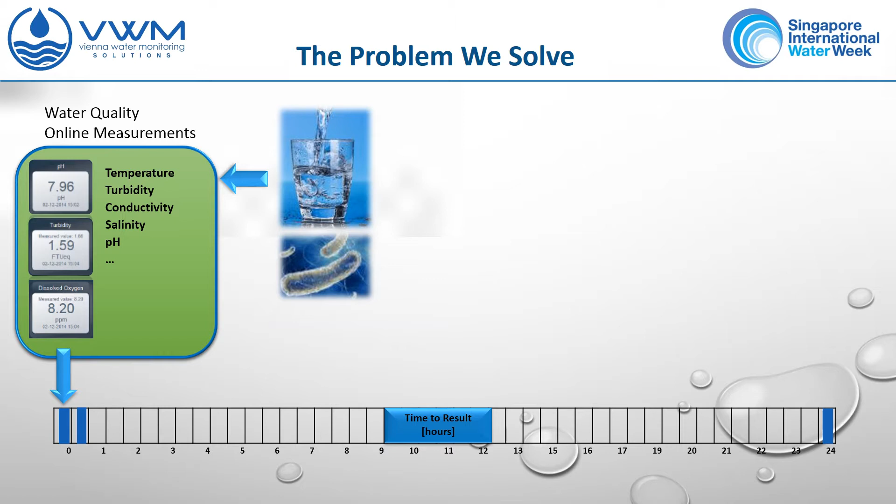If it comes to that water quality parameter, we still have to undergo the process of taking the sample to the lab, process the sample in the lab, and that's the time when already the first health effects occur. But then we have to incubate it, and then we have to count the cell cultures that have been formed, and then we get a result after 18 to 72 hours.

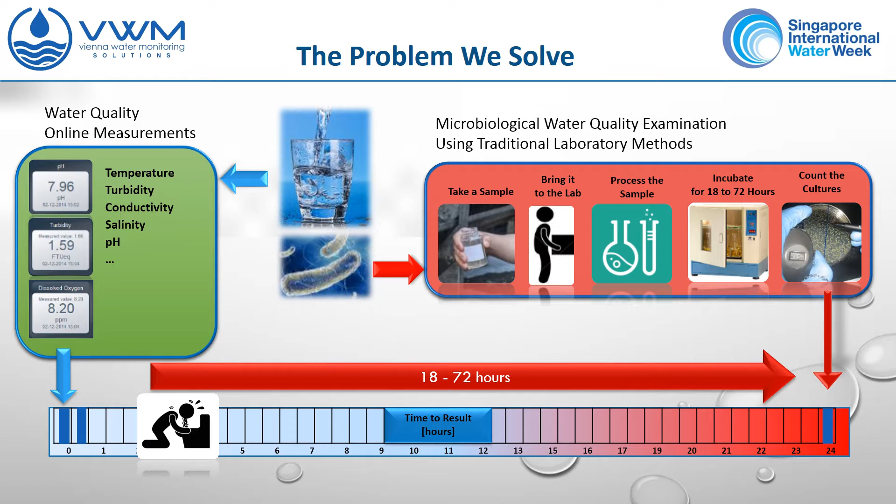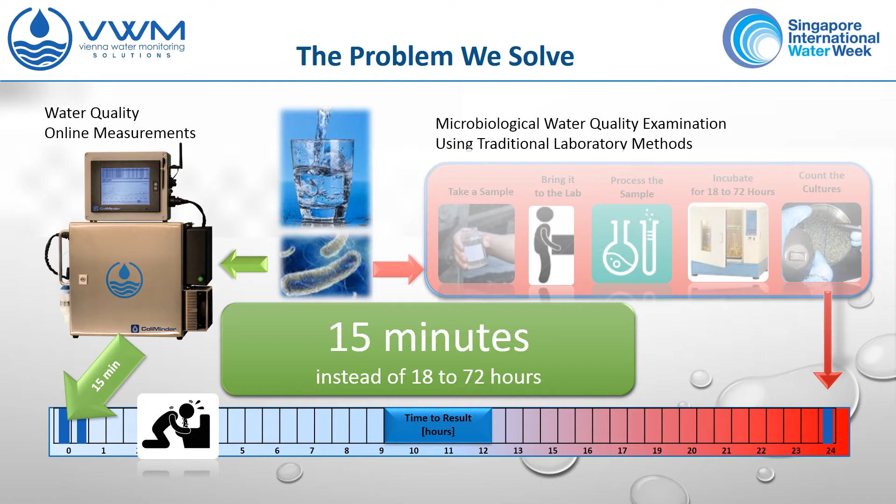And that's exactly what we're addressing with our technology. We offer this important parameter within 15 minutes and fully automated. Is this possible? How does it work? So we have a look at the traditional method to evaluate bacterial contamination. This method is based on

bacteria forming cell cultures. So a water sample is brought on a plate with growth media, and then we wait for 18 to 72 hours. And then we count the colonies that have been formed out of our sample. This takes 18 to 72 hours because of the growth of the bacteria, something we cannot speed up. So we had to find another solution, which is not depending on the growth.

So what we do is we are directly measuring the metabolic activity of bacteria. Bacteria use enzymes for their metabolism, so we measure the enzymatic activity that is specific for our target organisms. Both methods are measuring a direct genuine property of living bacteria. If there's living bacteria, some of them can grow cultures. If there's living bacteria, every living bacterium has to have a metabolism, otherwise it's not a living bacterium.

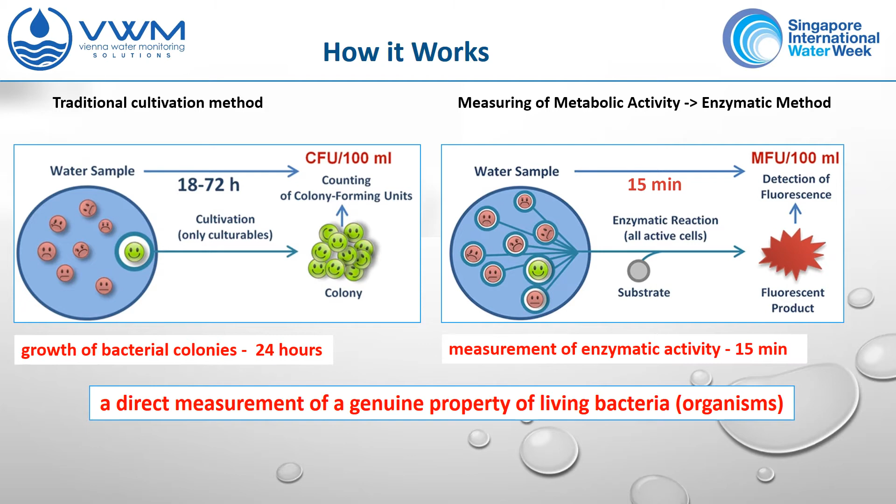And by utilizing the metabolism of the bacteria instead of the growth, we can speed up the time to result from 24 hours to 15 minutes. We are able at the time to offer reagents to detect E. coli contamination, coliform contamination, enterococci, or total bacteria.

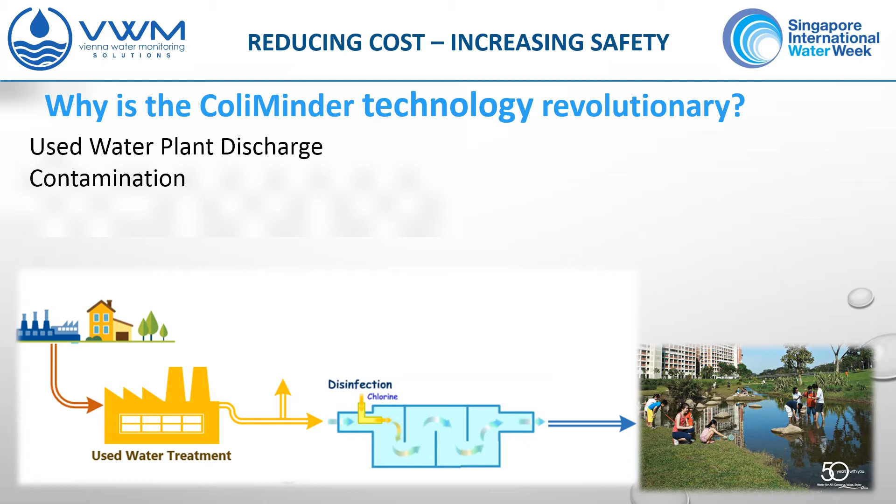I'll give you an example on why this technology is revolutionary. It's just one example, something which is easy to understand. If we think about a wastewater treatment plant or used water treatment plant, and if you want to dispose what's coming out of the plant into the environment without any hazard to the people using that as recreation area, we have to disinfect the outcome of the treatment plant, of course.

So if we would evaluate what's coming out of the treatment plant with one sample a week, it would look like that. Single dots of results, that's the contamination level. Not very much to see. If we would do a daily sampling, we would get these green dots here, and we see there is a contamination peak here. Contamination is about 2.5 times higher than here.

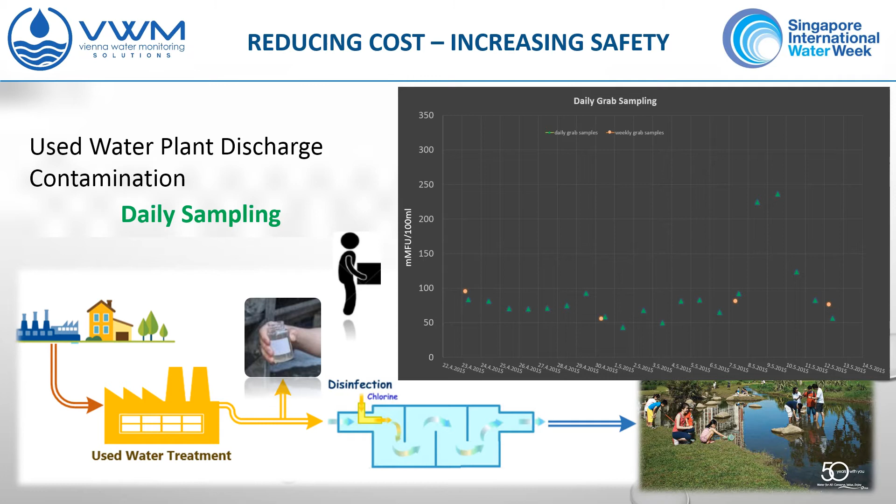But of course we would get these results always one day later, so too late to take any action on it. So if we now introduce our technology, the contamination timeline looks like that. That's an actual timeline of a sewage plant serving 1.5 million people. You see a daily fluctuation, a high towards midnight, a low in the morning. Sometimes things happen in the process, and then you've got a contamination peak just for a few hours. It goes down again. Sometimes contamination is higher, but you still got these daily fluctuations.

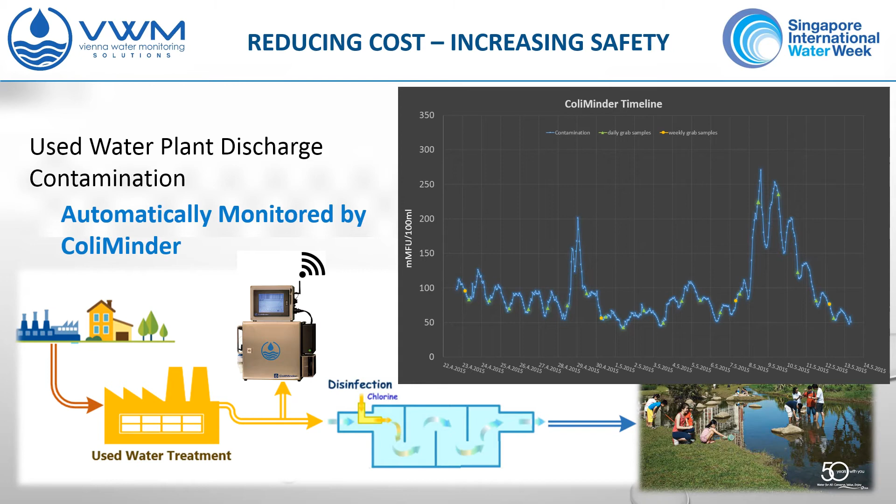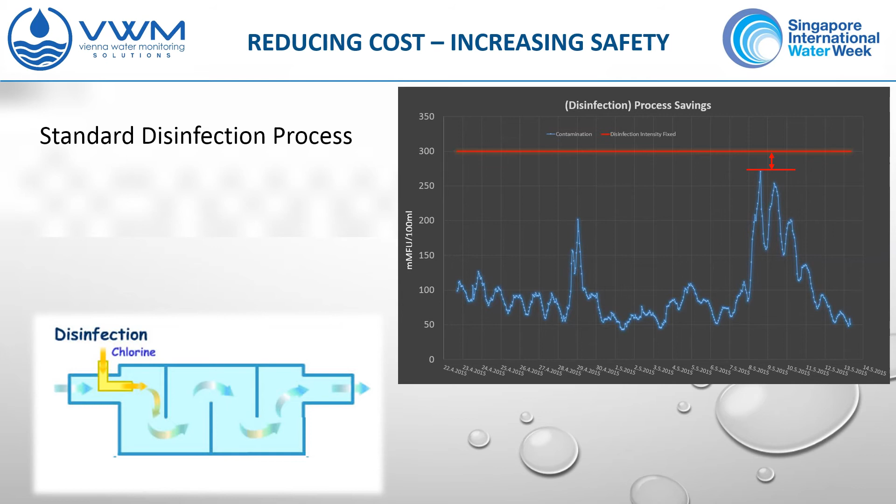So that's the real timeline of a real sewage plant. And as you see here, we get the result immediately, 15 minutes after the sample has been taken. If we now think about our disinfection process, with daily or weekly sampling we have to run a process at this level to be safe, even if a high contamination is present, even if a peak occurs. We have to have a disinfection process at this strength, just because we don't know what actual contamination is present.

If we now introduce our technology, we can exactly measure the actual contamination, and we can control the disinfection process according to what's actually in there, according to that line. So we can run a process like this, controlled by the reading of our ColiMinder. And compared to the standard process, we will first gain some more safety in the peaks, because we run the process at a 30% higher level than will be needed.

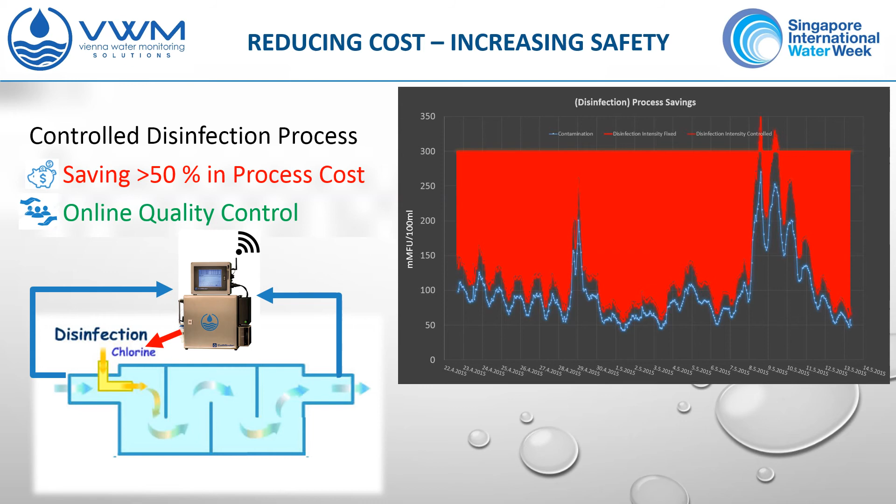But we will also generate about 50% reduction in process cost, because we don't have to use that high disinfection intensity all the time. And at the same time, we would be able to monitor what's coming out of the process, to safeguard the whole process regime and to make sure that nothing's happening.

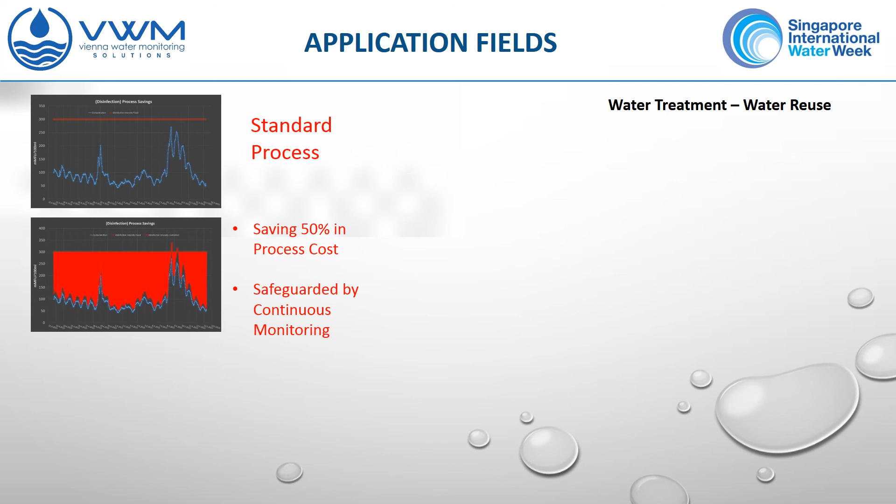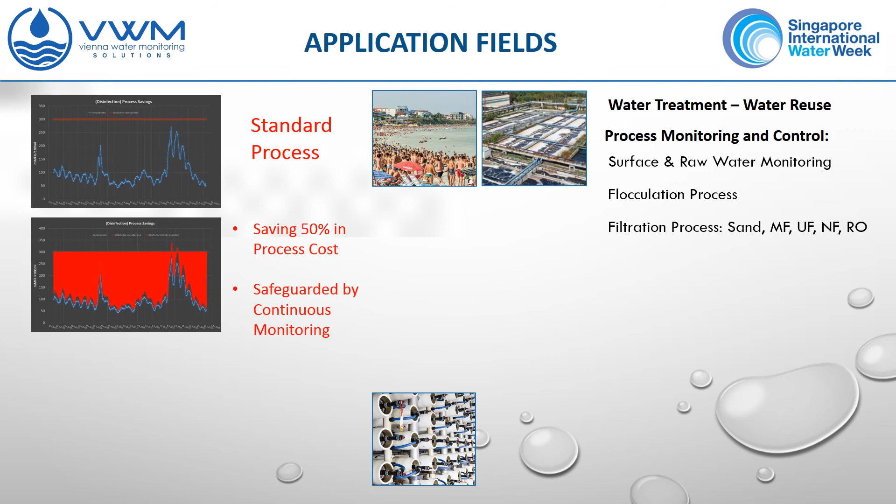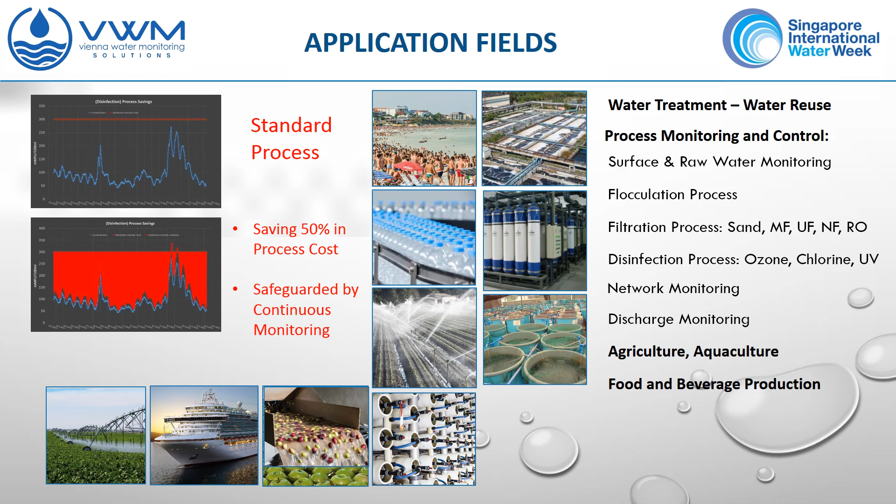So where could this technology be applied? Of course, water treatment, water reuse is a big topic. Process monitoring and control, surface and raw water monitoring, flocculation processes, all processes of filtration, disinfection, also network monitoring, but of course also agriculture, aquaculture, food and beverage production, cooling water, process water, pharma industries and oil industries.